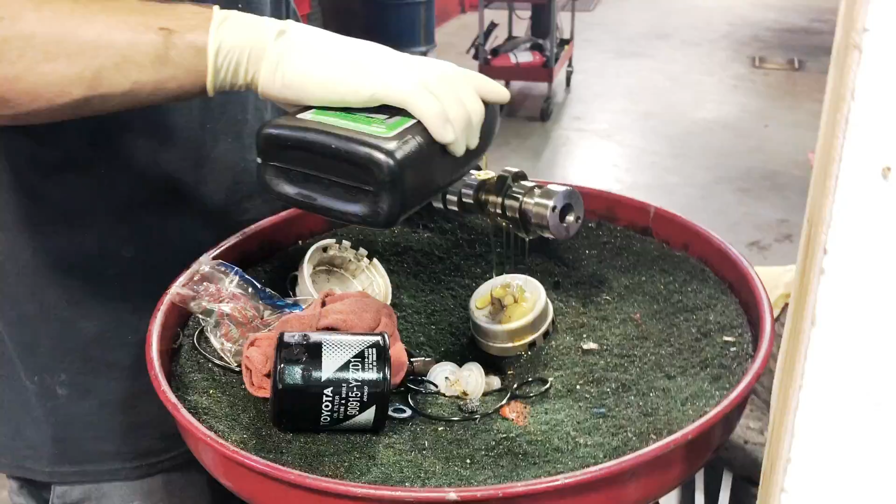Now today what I want to do is talk to you about why you should consider dropping a cam in your 392 and doing a naturally aspirated build as opposed to going down the forced air route.

Now, the bulk of the 392s that are featured up on my channel have some kind of a forced air setup in place, whether that's a centrifugal blower or a twin turbo. The results are very impressive. A stock 392 puts down about 420, 430 wheel horsepower.

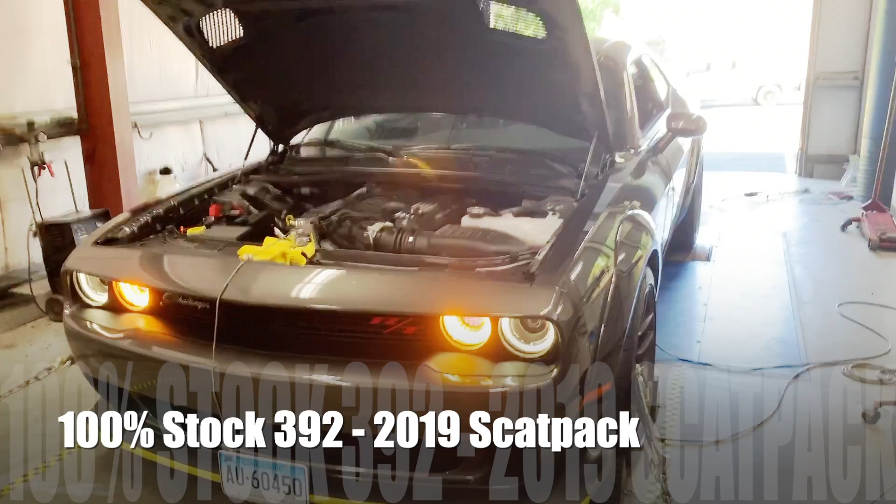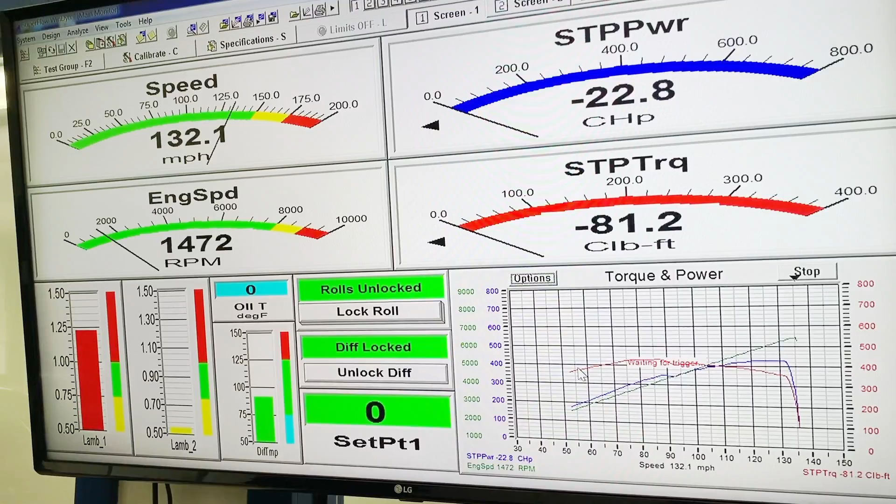And with 6-7 pounds of boost, depending on the setup that you go with and the tuner and everything, you can kind of pencil in about 170 to 180 wheel horsepower gain, which would put you in the ballpark of about 600 wheel horsepower. Now, there are some results that are better, some that are a little bit worse, but that is the ballpark of what you can kind of expect.

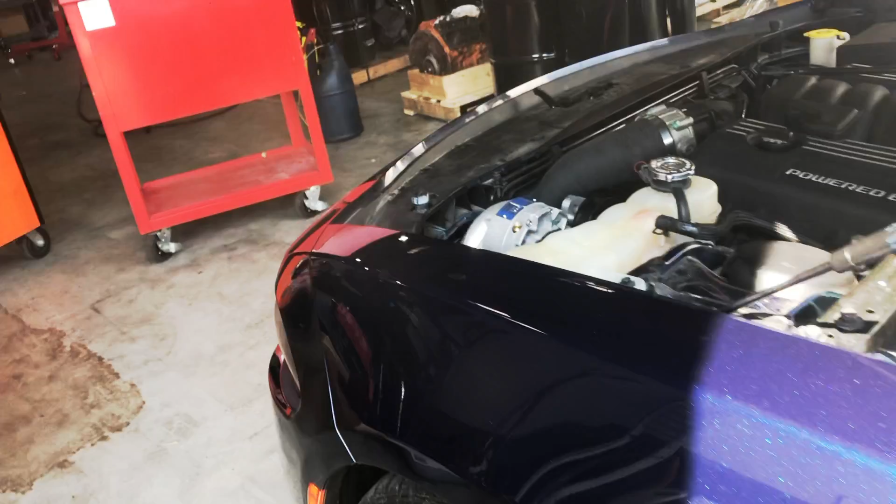Now, there's two drawbacks to doing forced air. Number one is it's not really recommended for a stock 392 to run any more than 6-7 pounds of boost. If you want to run more, you're going to have to forge the bottom end. You're going to have to crack open that engine, drop in some new pistons, etc.

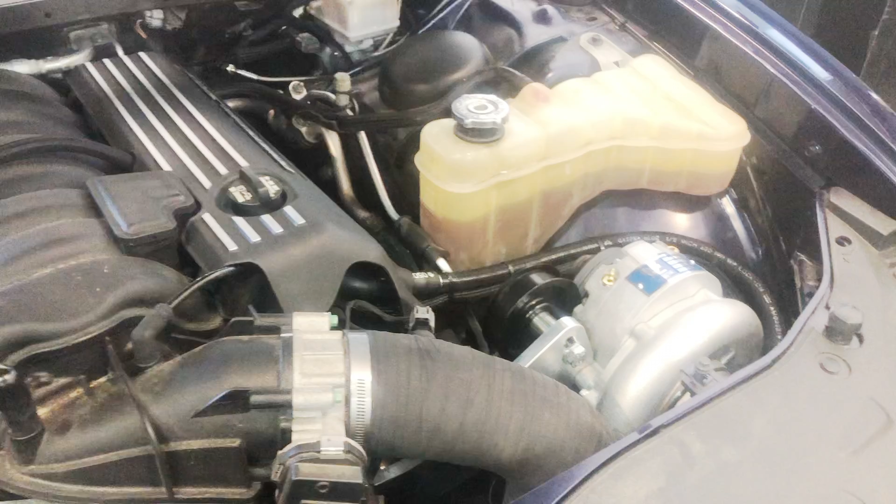The other thing that's a downside is the cost of forced air. It's about $6,500 to $7,500 for a setup, and then you have to pay for installation and dyno tuning.

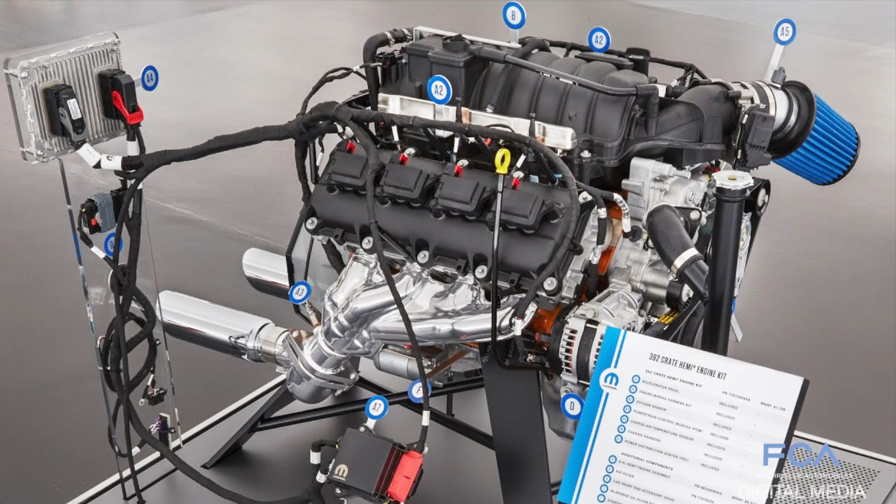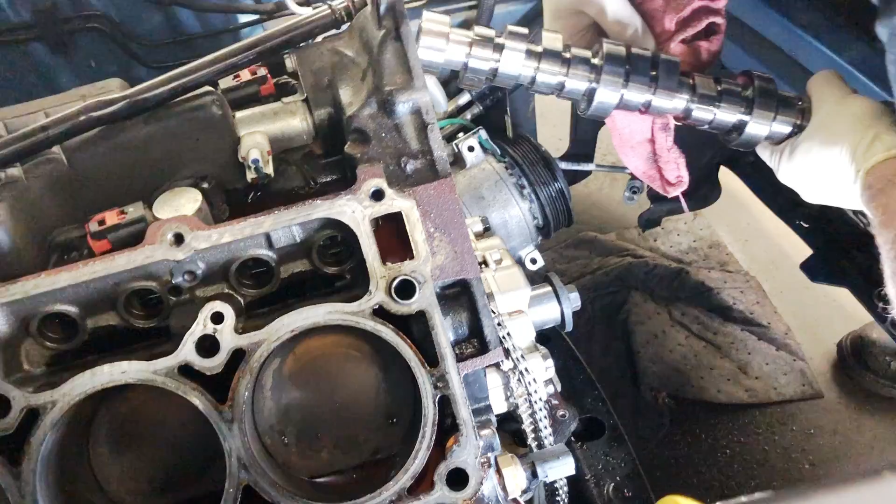Now, the other option that you have in place would be doing an NA build. And out of factory, the 392 is one of the best engines that you could get your hands on if you decided to do a naturally aspirated build. The compression is super high, much higher than any other Hemi. The pieces that are in place complement a naturally aspirated build. So you can drop a cam, put some long tube headers on there, and see some real significant gains.

Now, like I said before, the stock 392 puts down 420 to 430 wheel horsepower, and take a look at what it's capable of doing with long tube headers and a cam.

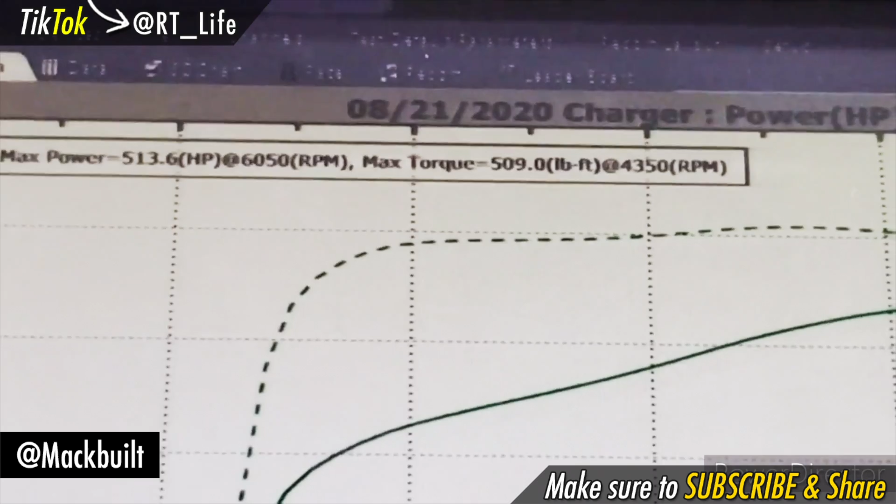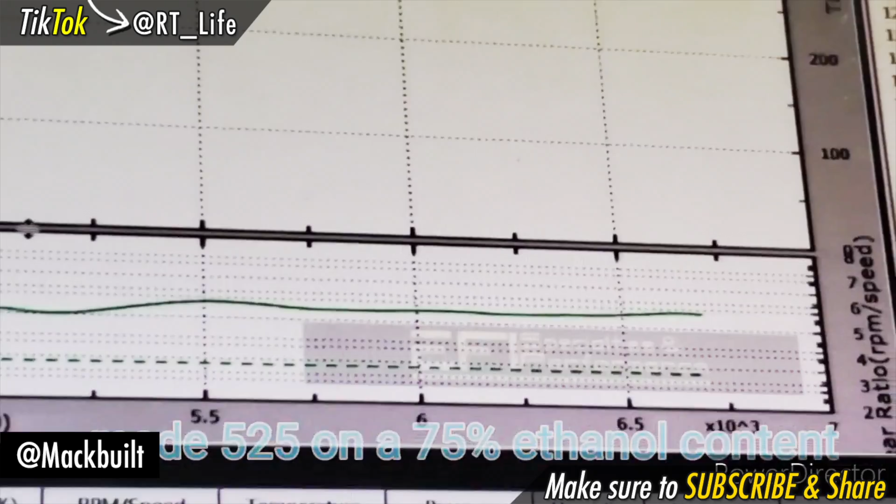That is stock intake manifold still, and pump gas.

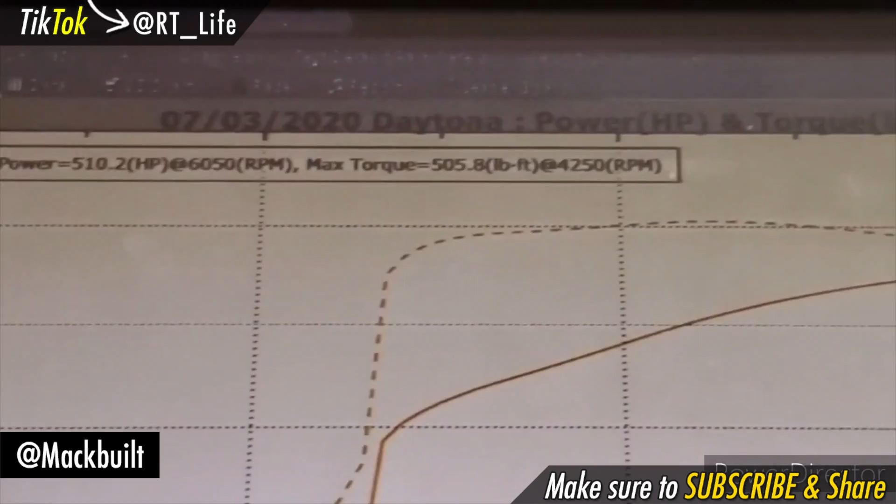Seeing a cammed 392 with long tube headers up on the dyno, putting those kind of numbers up on the board is certainly impressive. And it just goes to show that to make real power, you do not need forced induction. You're going to be spending a whole lot less money to get to certain levels.

Now, for those of you that want to take it up to that next level, you could always do a stroker kit. A lot of guys go with a 426, so they'll have a cammed 392 with long tube headers, and then put that stroker kit on there for an additional 50, 60 wheel horsepower. You could probably even squeeze out more power depending on the tuner and everything.

Most guys end up doing a conservative tune. This way it's not too much on their transmission and their diffs and everything like that. But the point is the 392 has a great starting point for a naturally aspirated build, and with those pieces in place, 550 wheel horsepower is easy, okay? And that would put you in the 600 plus crank horsepower ballpark.

You take a 392 quarter mile time, you're probably stock, mid to low 12s. You put a radial on there, you're high 11s. You drop a cam, long tube headers, drag radials, you're flirting now with low 11s, high 10s. And that's certainly impressive if you ask me, for the amount of money that you spend, for the performance that you've gained. I think it's pretty awesome.